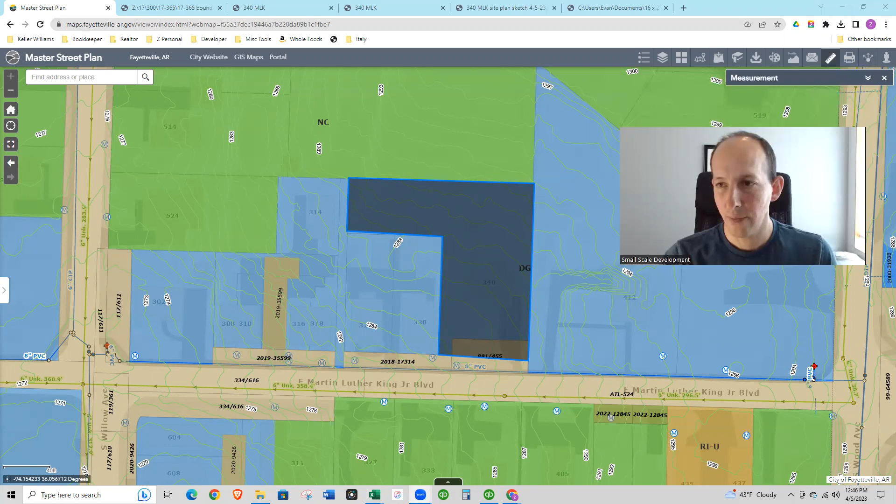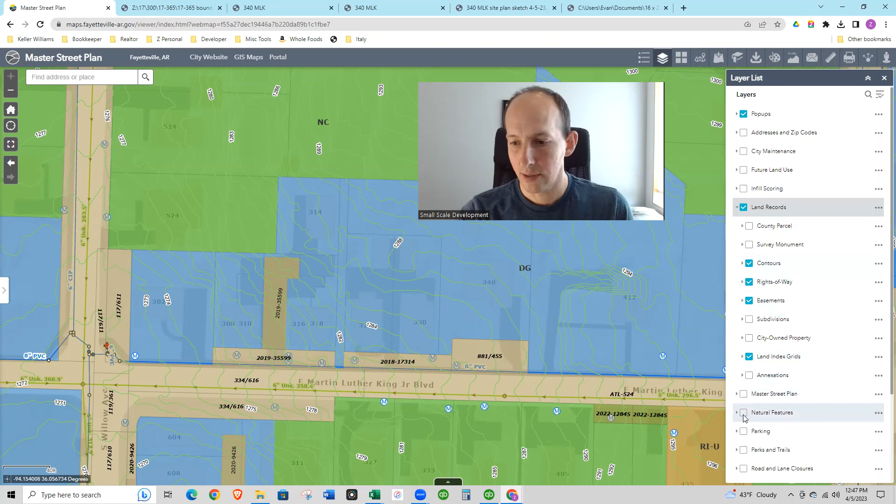So this is the site. I'm going to get rid of the zoning overlay so we can see what's here. Right now I'm looking at the city GIS, where you can see all the different things on the property.

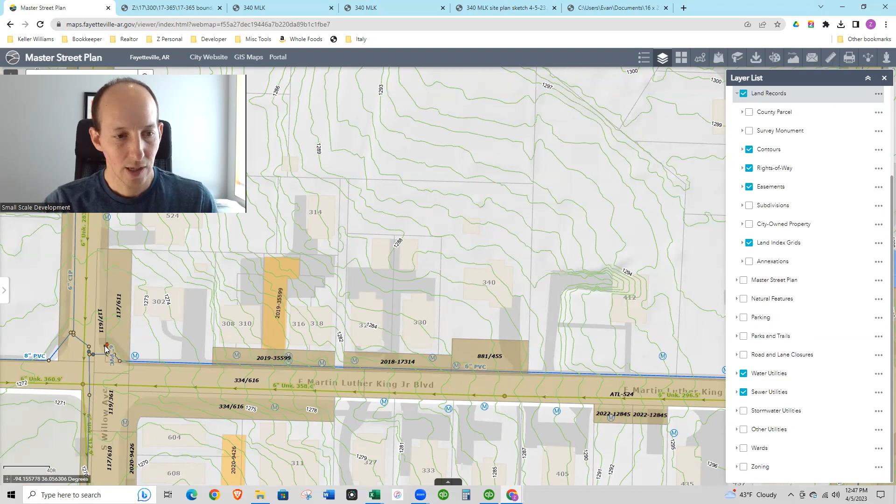I want to show you some of the things here. We've got an 8-inch PVC water line running in the front, so water is available. We've also got a 6-inch sewer line going across the street, so water and sewer are all set. We've also got a fire hydrant here, and another fire hydrant here.

We've got the elevation sloping from back to front, and there's an easement here.

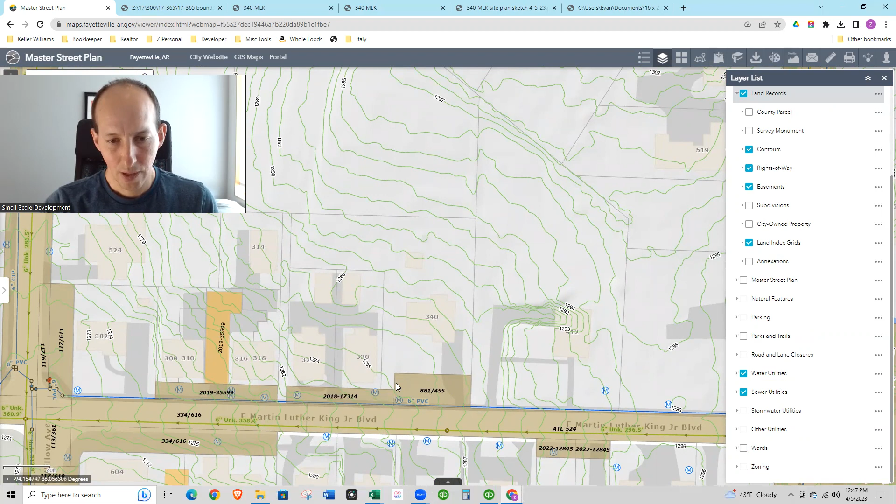This part in the front is what the master street plan right-of-way covers, so we can't build past here. If we wanted to build, we'd need to give this to the city because they'd expand the sidewalk and green space here. This other part, though, was put in a long time ago, and I don't know why.

What we'd like to do is actually vacate it—meaning we talk to the city and the utility companies and ask if we can vacate this easement and get it back, since it's not actually needed for anything. I don't think there's anything there, but we'll have to check. That's something I'll be working on.

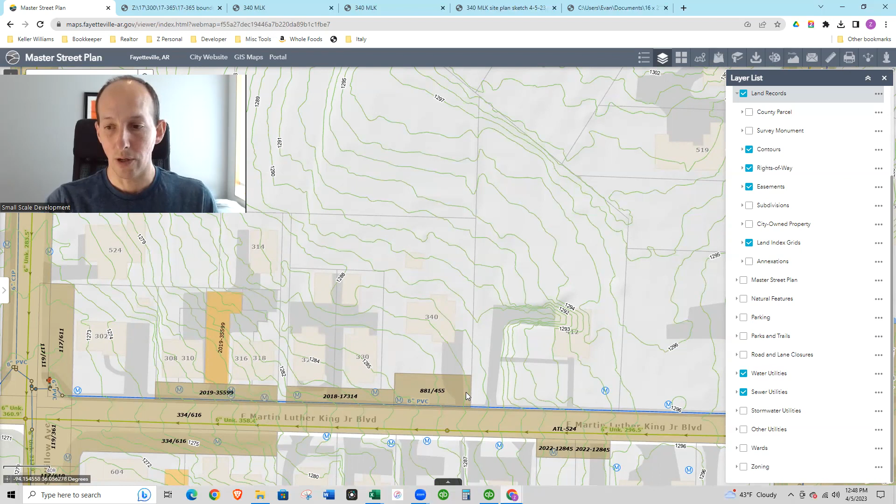I'm going to take off the contours as well to clear up the site view. Right now there's a house on the property, but it's in pretty poor shape, so what I'm looking to do is put in multiple units on this site.

I've met with an architect—actually a couple of architects from the same company. Let me pull up the survey so you can get a feel for it.

Currently there's a driveway here serving this property. What I'd like to do, since this lot is somewhat narrow, is extend this driveway and use it for this property too, so we can run cars back here.

I've gone through a number of sketches on graph paper just to lay it out and get a feel for what we could do. I did that first, before talking with an architect, just to get a sense of what's possible here.

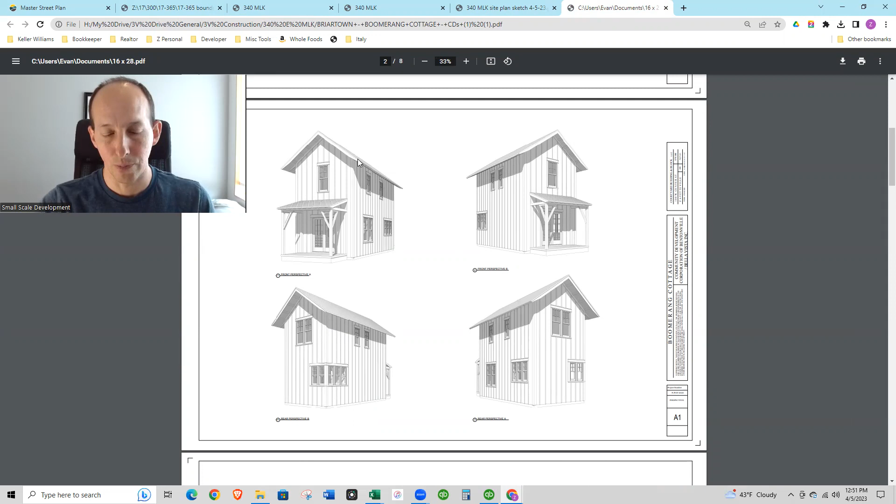Here's the house example—16 wide by 28 deep, with a lot of windows. We would do them as townhouses, so the windows wouldn't all be like this, and it would look different as a townhouse versus detached, but this gives you a flair for what it looks like.

So downstairs you enter into the living room, half bath, washer/dryer, dining nook, and kitchen. Then you go up the stairs, and there's a bunk room—7 feet 8 inches by 15—enough that you could put a bedroom here.

A single bed here, a single bed here, or it could just be a nice little office or workout room with an exercise bike or something like that. A desk on one side, an exercise bike on the other.

What I'm thinking would be nice is to put a small balcony off the back here, so you could open these doors and sit out and have a cup of coffee. We've got a full bathroom here, and a bedroom with a closet here. So pretty simple, and maybe there's room for a little desk here too.

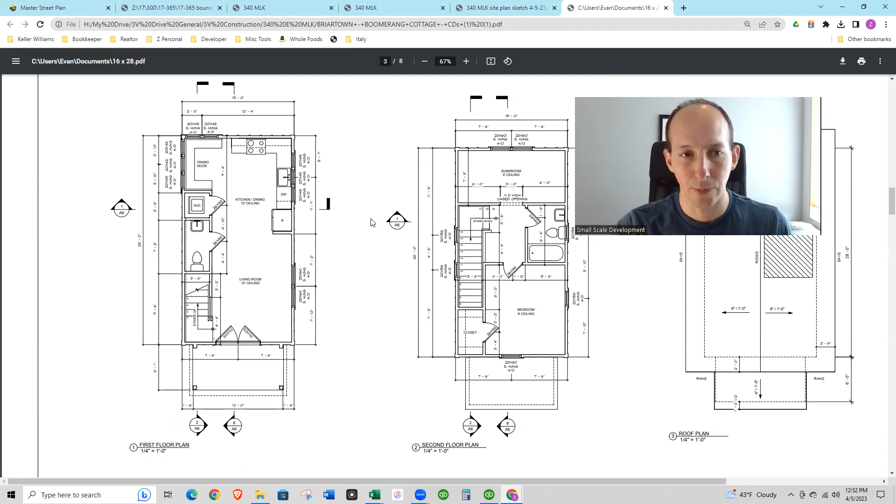What is that? 16 by 28. I think it was about 840 square feet, if I remember correctly. So fairly straightforward. I'm going to roll down here and you can just see the furniture.

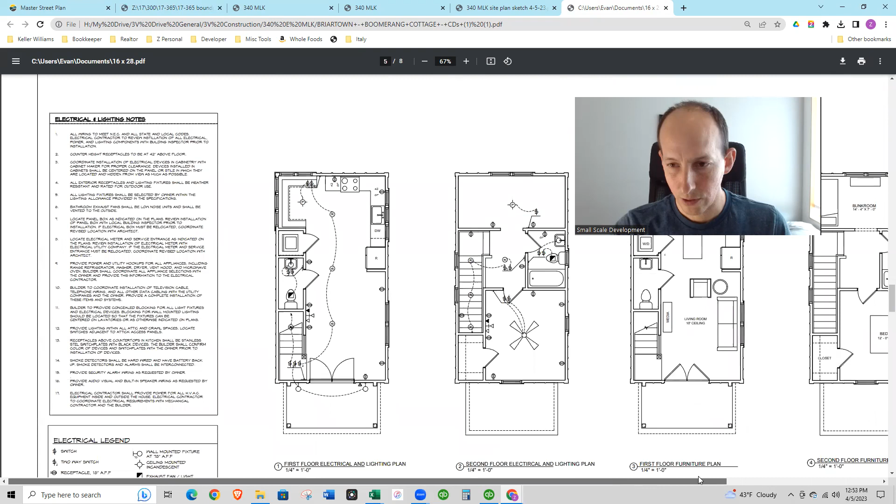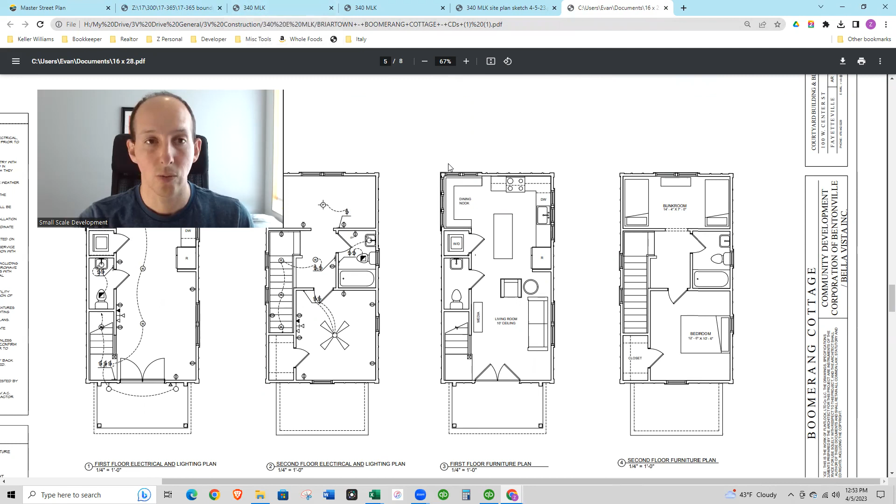So furniture layout, what that might look like here. I like that concept. It's fairly simple, small. It would be good for rental wise, or for sale. If we wanted to sell them or rent them, I think they would be in high demand.

Some of the things we have to think about when looking at this is parking count. For a single family, duplex, or maybe triplex, you're required 2 parking spaces per unit. However, if you have multifamily, then it would be 1 parking space per bedroom. So if we're going to do these all as 1 bedroom, and we've got 10 units, we would need 10 parking spaces.

Another thing we have to look at is tree preservation and tree canopy. I think these are existing trees on the site, and what we would need to do is mitigate — if we remove trees, we'd need to plant some new ones. And this one here, it's possible that we can preserve.

Another thing is we need to think about the drainage and stormwater runoff. We need to basically mitigate all of the impervious surface we're adding to the site, since there's a lot of rooftop and a lot of parking here. In this plan, we actually have a nice green space where we can flow the water to this center area and put some sort of rain gardens or stormwater management right here, but also make it usable. So we'd want it to be pervious, maybe with underground tanks or some way to control that runoff.

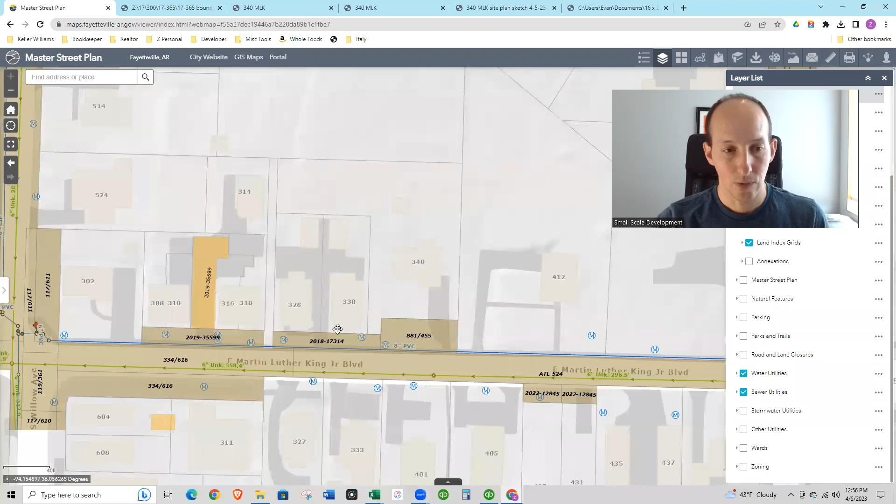The other thing we have to think about is fire trucks — how far we are from the fire hydrant. This will be different depending on where you're developing, but we'd take a look at this and measure: coming across here that's 350 feet, and then we come back here, and that gets to 500 feet. So I think either 500 or 600 feet is how far we can be from a hydrant.

There's also one over here, so if we were coming from this side, we'd be here. Okay, so we're closer on this side — we're under 500 feet, I believe.

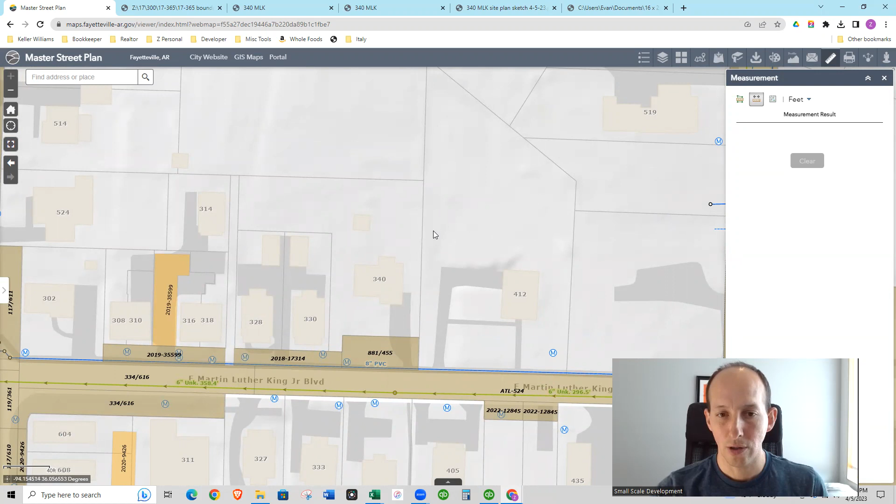The other thing we have to look at is when you park the fire truck, I think they have a hose that's 150 feet long or so. When you park the truck, any building has to be within a certain distance, let's say 150 feet of that truck and hose. So you take where the truck parks and measure to the furthest distance. I'm not sure exactly how that's calculated, but that's something the architects were looking at — worth it for me to learn better. We couldn't put these units further over, I think, because then it gets too far.

Additionally, there's a 150-foot rule: if the truck has to drive in more than 150 feet, you have to provide some sort of turnaround for them, whether that's a cul-de-sac or a T hammerhead, where they can go in, back up, and turn around. I believe since there's a driveway here, this could work as a turnaround spot. It may be narrow and need modification, but that's something we're talking over.

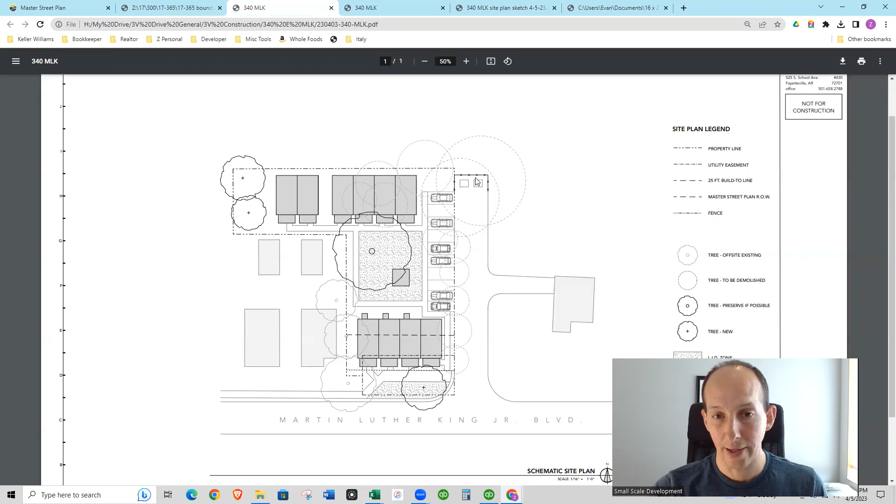So after going and looking at this, I talked with the architects yesterday, and I thought of a couple things that made me want to change it up a little bit. This isn't nearly as pretty a picture, but this is just how I work and operate. I don't have the design and computer skills they're using, so I do it on graph paper. It's simple for me, so apologize here.

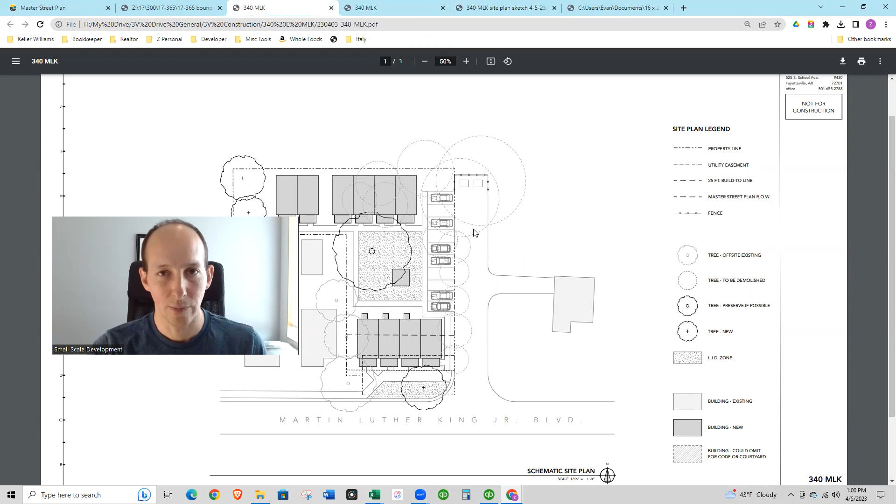What I was thinking in this plan is it's a very big open space, which is nice, but I also feel like we could make it a little more compact and compartmentalized. So rather than having 4 up front here, we have 3 up front here. They all kind of look out onto this quad. We have 3 parking spaces here, 1 for each of these units. We put the trash bins up front, except that we have them fenced off so they're not visible.

We have these walkways here that go around the property. This part is a nice green space area, and we have a pavilion right here - some sort of covered thing where people can sit under, whatever it may be.

We have the same 16 by 28 units back here, except we put 5 of them, and we've got 5 spaces for cars - 1, 2, 3, 4, 5. And then this one right here on the end has an extra porch on it, which looks out onto this area here. Additionally, people can walk over here too.

So this could be fenced in for a dog run, or it could be raised bed gardens, or just some additional community space that may be used differently than this space here. Whichever that might be, if it's dogs, I think that would be a good place a little bit out of the main area, or if it's something else, I'm not sure yet.

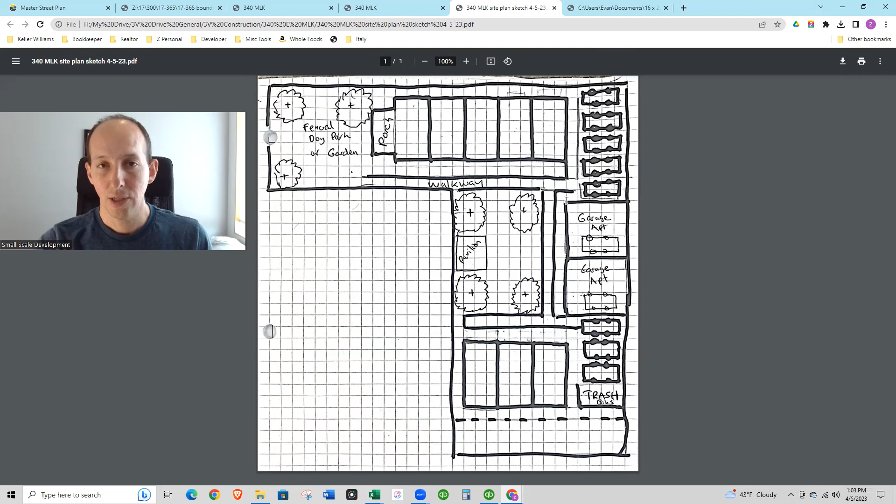We get 5, 6, 7, 8, 9, 10 units here, and I think it's coming back to - we've got a site that is, well, I'm going to cheat a little bit because I'm going to include the driveway that is over here and add that into the area. But we're about 0.4 acres, and we've got 10 units.

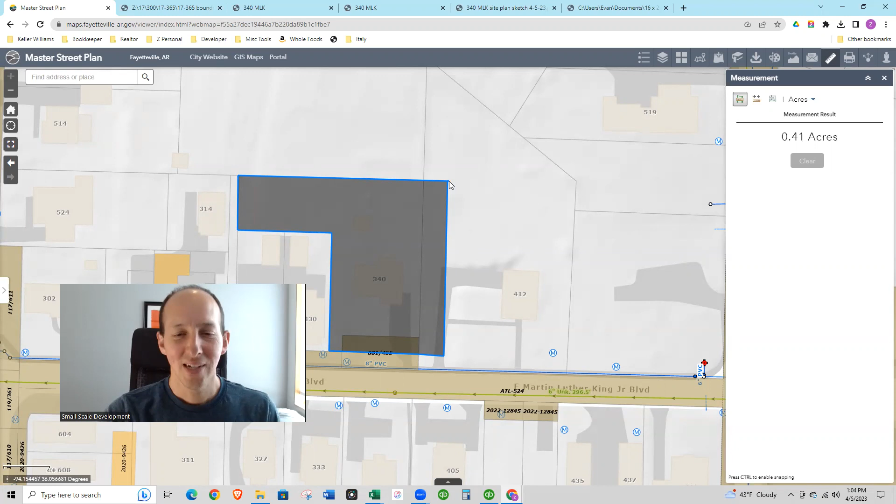So I'm excited about this, and I will keep you updated as we move forward and get further along in the design. Also I'll let you know when I put together - I do have a pro forma for numbers, so I will put that into a prettier form and show you how I think about the numbers too from here on out.